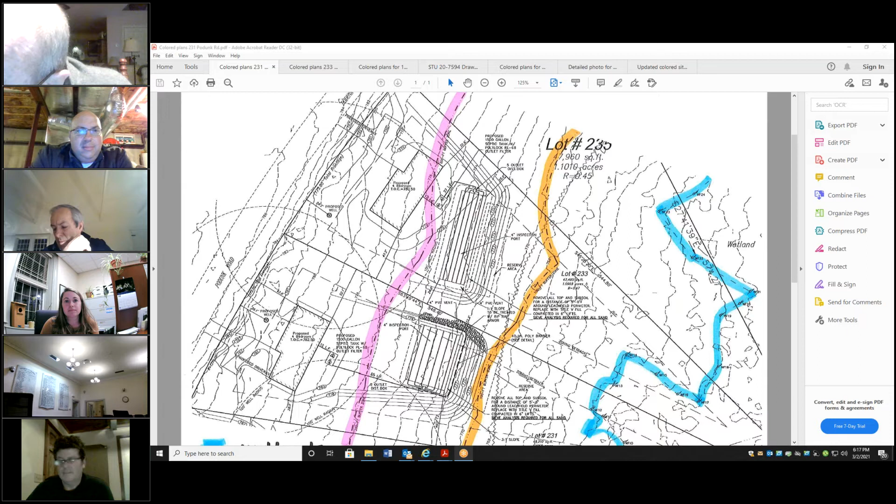You all set? Okay, Jeff, could we check with the audience? Hold on, we've got some video problems, it looks pink on TV. You mean other than the fact that I'm on screen causing the broken video? No, it's something else.

Is there anyone on the line that would like to speak to 233 Podunk Road? Is there anyone on the public line that would like to speak to 233 Podunk Road? No one's on the line, Mr. Chair. Thanks. With that, I'd like a motion to close the public hearing.

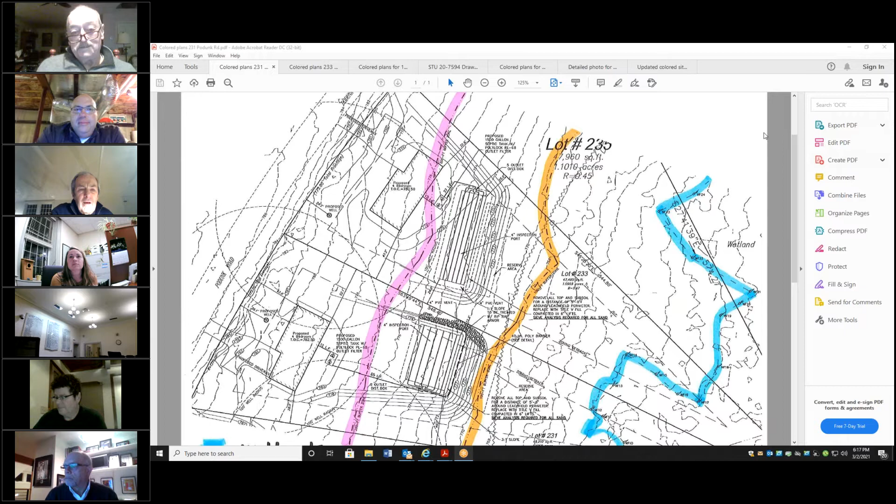So moved, Eric Kaspar. Seconded, David Barnacle. Any discussion? Hearing none, I'll take a vote. Eric, how do you vote? Eric Kaspar in favor. David, how do you vote? Barnacle in favor. Steve Haldeman, how do you vote? Steve Haldeman in favor. Stephen Chittister in favor. And Ed Goodwin in favor.

Do I have a motion to make a motion? I'll make a motion - David will make a motion. I make a motion that we approve of the local NOI regarding 233 Podunk Road for the construction of the associated site work and the construction of a single-family home there. Do I have a second? Eric Kaspar second. Any discussion?

Seeing no discussion, we'll have a vote. Stephen, how do you vote? Stephen Chittister in favor. Eric? Eric Kaspar in favor. David? David Barnacle in favor. Steve Haldeman? Steve Haldeman in favor. And Ed Goodwin in favor. Passes unanimously. Thank you all, thank you, Mary Ann. You're welcome, good night.

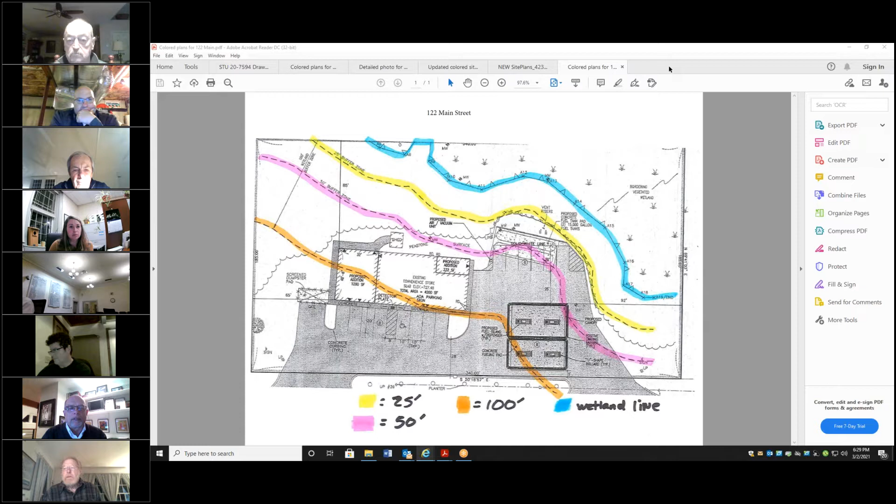So to accommodate that, they're requesting permission to relocate the pump islands as shown on the plan. It would be basically, as you're looking at the drawing, to the right side of the existing building close to Main Street. In doing that, it would allow us to create a little landscaping in front of the building, ADA compliant parking, and have the parking stacked in front of the building. We think it makes for a safer environment.

Now, as part of the plan, they are also contemplating two small additions to the building. One would be in the rear corner. If you've been out there, the building has sort of a little notch in the back, right in that area. It would be a small infill addition, within an upland area of the site at the top of the slope. Then a second addition on the opposite end of the building, the north side, would add some capacity to their existing facility, replacing an existing paved surface.

So we think from a mitigation standpoint, we're getting rid of parking lot surface in that area and replacing it with a building. As you might expect, we'll have a little better runoff quality coming off that surface when this work is done.

We also looked at some of the other paved areas of the site, particularly on the edges close to the wetlands, where we're proposing elimination of some additional pavement. I think in total, in addition to the area the building addition would occupy, we're probably going to eliminate another 1,400 or 1,500 square feet of paved surface and replace that with landscaping.

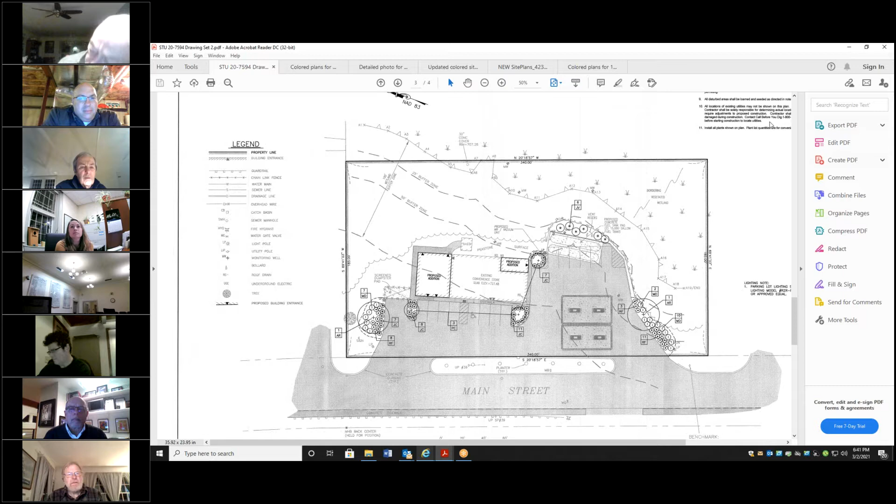There's no one on the line, Mr. Chair. All right, thank you, Jeff.

Thank you. Mr. Chairman, could we ask one more question based on the explanation he just gave to Eric? Sure. When the tanks were taken out and new tanks put in, was there any testing done under the old tanks to see if there was any amount of residual materials left? And has this been reported to the state, or did they miss the state as well as missing the town? My understanding is there's been an LSP involved in all the work on the property. There had actually been an LSP on site prior to the tank removals, and during the tank removal operation they had the fire department involved as well. So they did follow all the state procedures for tank removal, testing, and replacement. They did unfortunately skip you folks, which is not appropriate.

I'm also not very happy on my client's behalf that the contractor has not put up the silt fencing yet, because that was something I had mentioned to them months ago that should have been done. So my call tomorrow will be to the contractor on that issue. I can't make excuses when they're not following even the basic rules.

Isn't there a requirement that the town be forwarded a copy of the results of the testing that was done? I thought that was protocol. I'm not the LSP, and our firm did not provide that service, but I can find out who that consulting firm was and get that person directly in contact with your office to make sure the paperwork gets there. That'd be good, thank you very much.

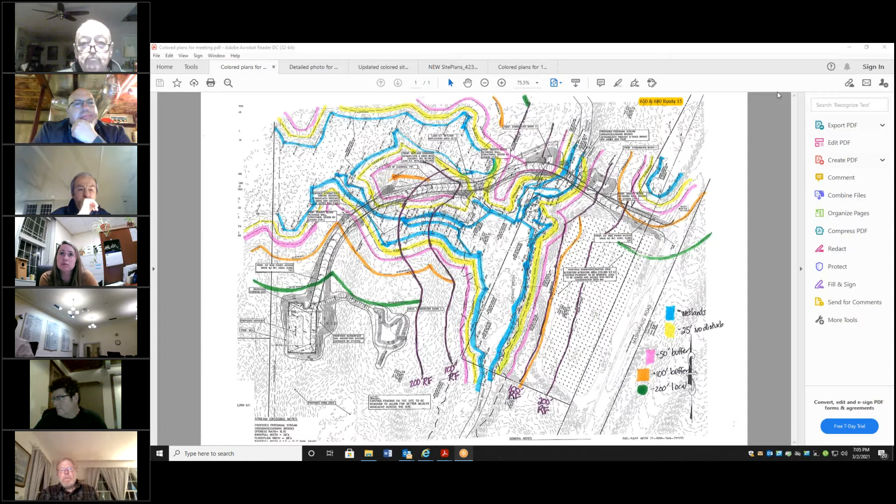Anything else? All right. With that, I'd like Mark - or what? Should we go to the public? Yeah, public. Jeff, do we check with the public?

While we're waiting, I forgot to add - one of the comments from the Board of Health was that they show a proposed septic system back here. There's been no perc testing per Board of Health back here, or no records of that, in order to approve a septic system there if it gets to that point. You guys are going to need a perc test out there. That's in your report. Yeah, right, it's in my report. Yeah, we're aware of that. Obviously it's chicken and egg.

We have to get in there to do the perc test, but you're right. If they're going to put in a bathroom - which by the way, they did not propose a bathroom to us - we put that aside in there just as a placeholder in case they do expand to that point.

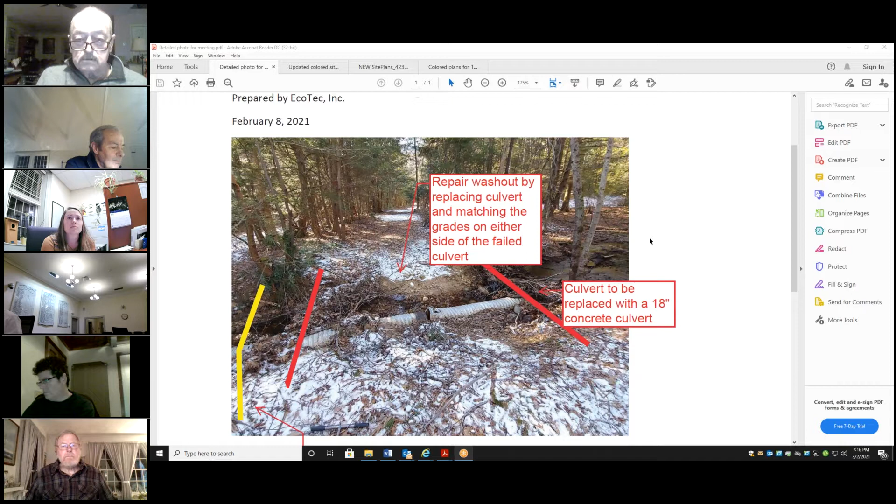I think that pretty much summarizes it. As I indicated, we feel it fully meets those agricultural exemptions. And even if the commission felt it didn't, I think repairing and replacing this culvert at the same exact size and restoring that area would be an improvement and would prevent sediment and material from washing downstream during large storm events.

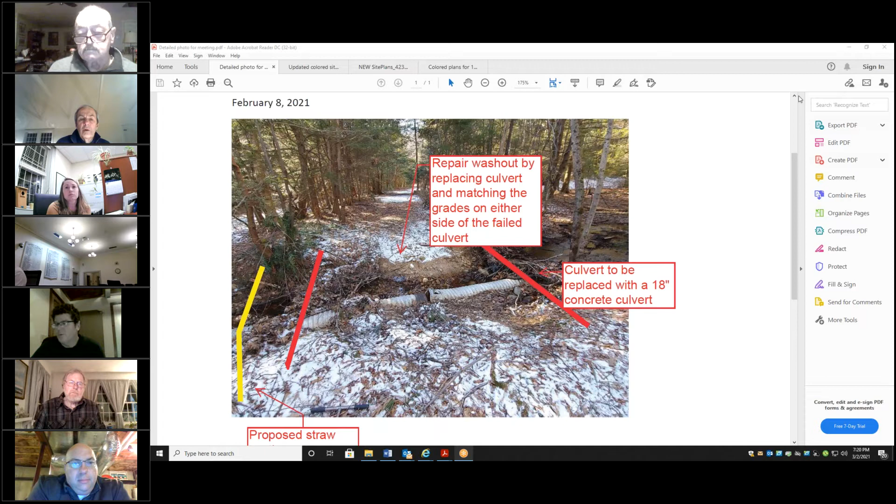Stephen: Same comment as David, and I agree with Becky's comments. Steve Haldeman: I agree with Becky's comments, and I think we should follow them and require those comments. Eric: DEP seemed unambiguous in this, so I would tend to follow what they have to say and Becky's comments, so I'm in agreement.

Let's clarify. You approved the logging permit at the last meeting, four of you. At that time, Michael told you they were not going to take trucks onto that property, that they were going to use the skidder only to go onto that property, and that they would put a temporary crossing there. So to come back in and ask for a permanent crossing is for a sand and gravel operation, which is what they intend to do next. So Becky's exactly correct. We need a positive number 3 and a positive number 5, and it's as simple as that.

Do I have a motion to close the public comment? Go ahead, public comment, please.

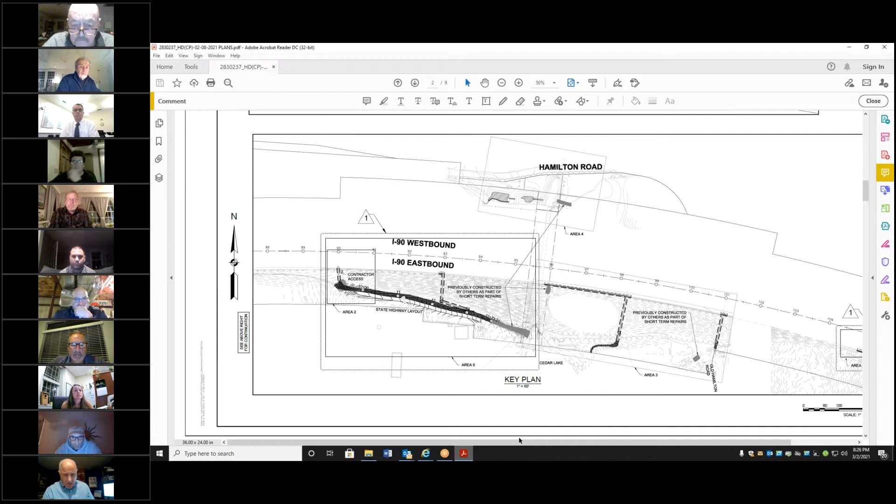This plan helps because it's a long linear site that we're dealing with. The plan on top is unchanged from the work we had proposed previously, with just the two catch basins way to the western end, basically the top of the drainage area along the turnpike. But on the southern, bottom section, we've added a new area to the east end of the project - we're calling that area 6. The area in the center, which is the low point, the pipes have already been put in going down the hill - that's area 3. Area 4 is on the north side of the turnpike, and areas 2 and 5 are that bigger area. So how about we go to the next page?

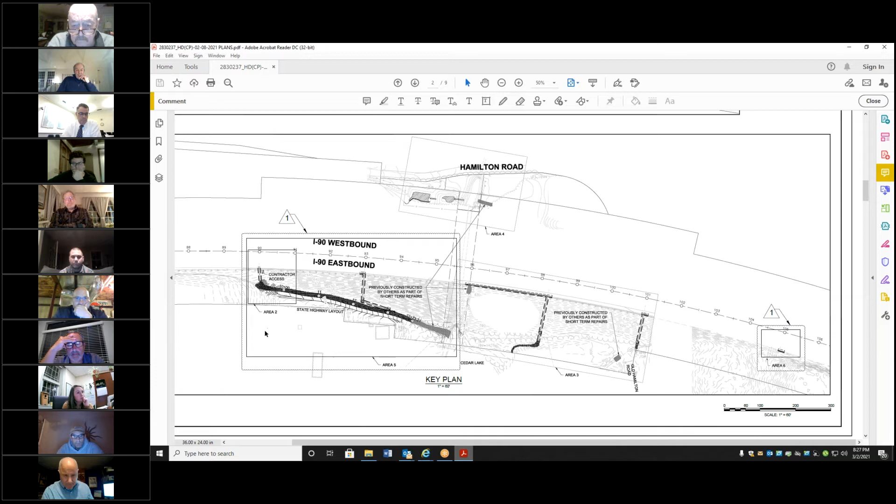And please, anybody who wants to jump in, please do. The box to the lower left is area 6, where there are existing drain pipes coming from the median that outlet into a swale there, and we've decided to add a catch basin. The turnpike has what they call a special drop inlet, a catch basin with a 2 foot by 4 foot grate opening, so it catches quite a bit of water. Directly over the pipes, we're putting a more standard catch basin, which is a 2 by 2 grate. Both of them have sumps, so we'll be collecting debris before it gets into the drainage system.

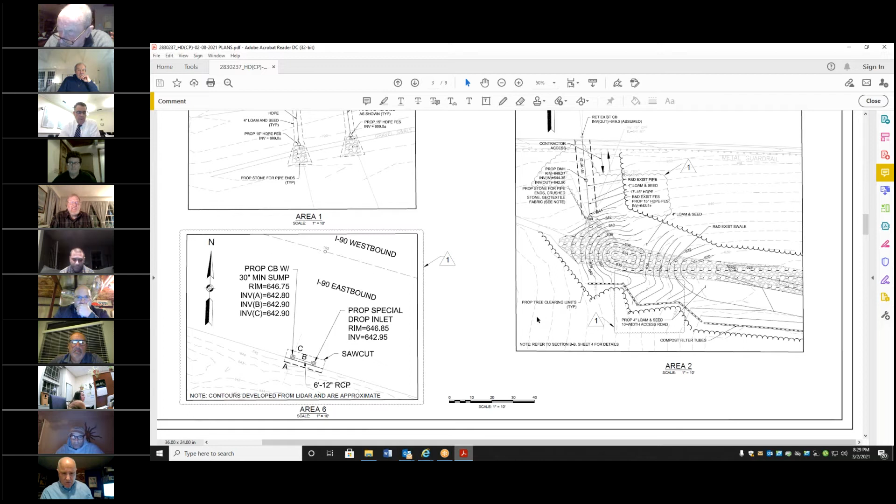Now, on the right side of this plan view, there's an existing drain that comes from the turnpike down into the small infiltration basin we had proposed previously. Correct me if I'm wrong, Arthur, but I believe Arthur did video of it, and that existing plastic pipe was not in good shape, so we made the decision to replace it with ductile iron. Then it comes out at a flat slope in order to reduce the velocity going into that infiltration basin, and continues into the swale, but that's shown on another sheet. So we can scroll to the next sheet unless there are any questions.

I have one question, please. Sure. You indicated debris - can you give us an indication about what size debris is being filtered out, please?

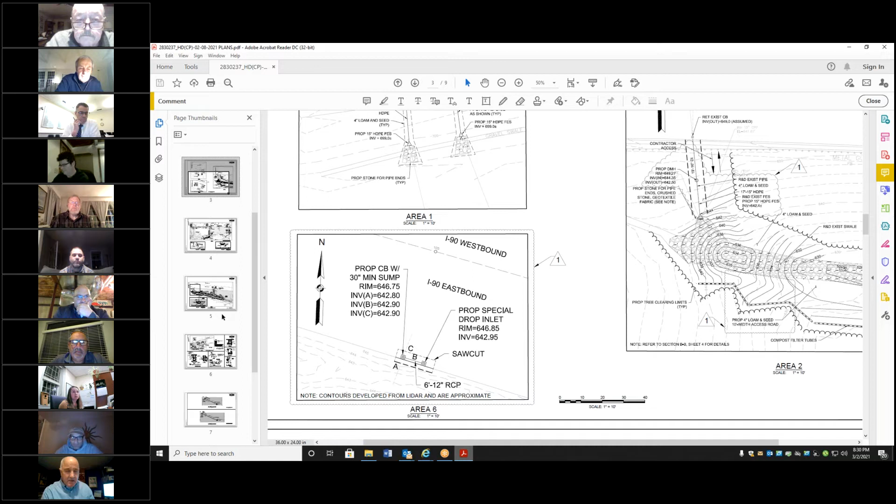Well, it's just the small grit that accumulates on the roadway surface. There may be small pieces of trash that fall down into these catch basins, but it's got to be pretty small to make it down into the grate area. One always worries that everybody's definition of debris size can vary monumentally.

Good point. Well, this area is area 3, which had been previously proposed. The only change we're making here is that when we got into construction, Arthur and others noticed that the existing structures in the gutter were makeshift, and we really don't know why they weren't very good structures. So MassDOT has decided to replace each of them. There are 3 new catch basins going in. At each of these points we have the 2x4 catch basin, typically on the uphill side, which will catch the majority of the water. On the downhill side, we have the smaller 2x2 catch basin. So that's the only change on this sheet, the addition of those 3 catch basins at each of these locations.

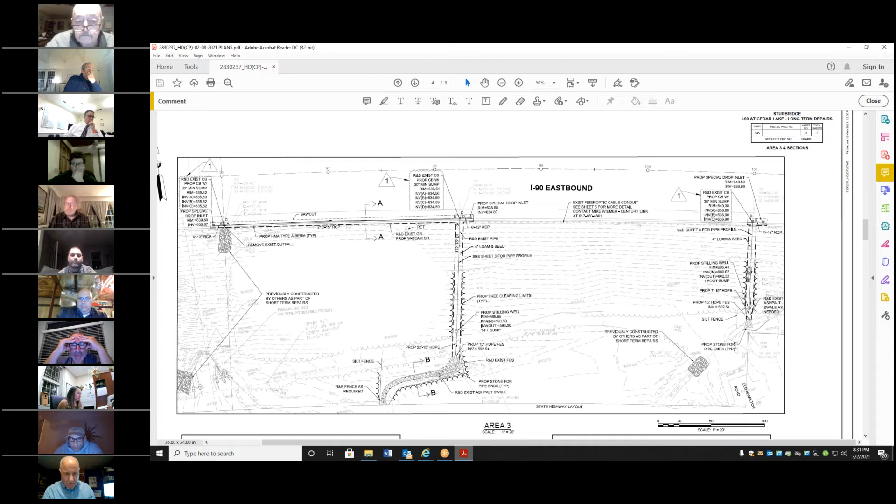So this is a brand new sheet here. BSC performed survey just before the snow fell back in December, I think it was. We had some survey in this area, but we've augmented it, and we went all the way down to the layout line of MassDOT. We also located the house there that you can see just off the edge of the Turnpike property. It's very, very close to Turnpike property. And that's the one that had that incident back in the fall.

I think there was a large rain event and then a blockage in the swale. So we have now called for the entire swale to be replaced, and there's a section there that shows stone that we're putting in. It'll look essentially identical to the one that's out there today. The one thing we did do is create a relatively level area to the south side of the swale, so MassDOT can come down and do some amount of maintenance. It certainly isn't going to be equipment that's typical on a roadway, but Arthur can speak to greater length about that, vehicles or equipment that can come down in there to clean the catch basin.

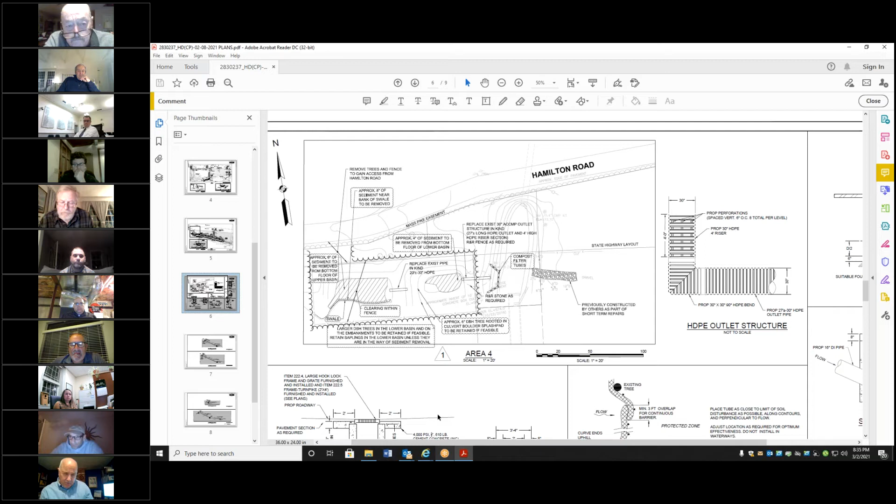And then if we continue down on the plans, Rebecca, not the next sheet which is the typical profile, but the last sheet, this is the new sheet that shows the two new lines that have been designed.

So that's the extent of the changes. Was there anything that I missed, Arthur, or that you want to expand upon? I think that's it.

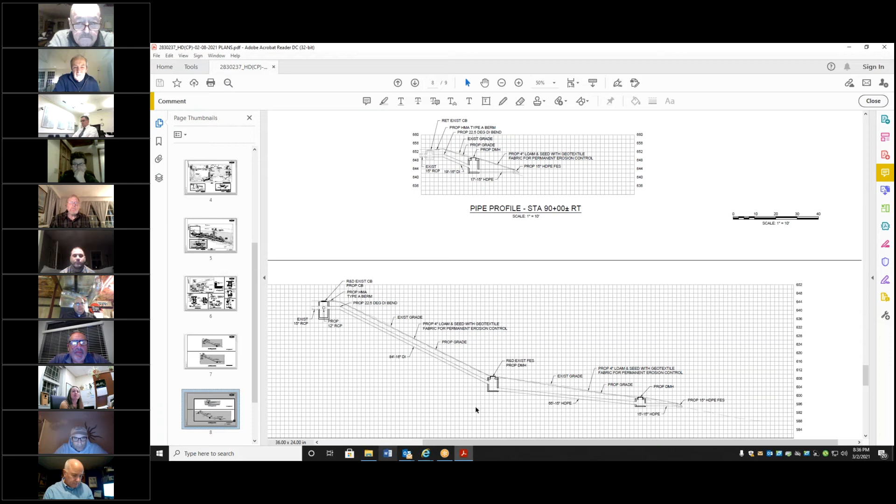Well, that's pretty damn good. That's what we were arguing about at the beginning, wasn't it? To get those changes made originally? Yeah, right. Wasn't that the conversation about which was more of a benefit - to take down trees and do what we're doing now, or to leave a buffer. I think we've all come to the conclusion that redoing the entire swale is the proper thing. Good.

When, what's the timeline on this? I gave the plans to the contractor last week, he's looking at them now. Obviously there's quite a bit of work on that swale - I think up to a couple hundred tons of rock that's got to get moved down there, so that's going to take some time. He's got to order his concrete structures, which there's been a delay due to COVID on the concrete structures throughout MassDOT.

That's probably the one area we really don't have any control over, the precast structures. One precaster went out of business, so everybody's kind of scrambling, and a number of jobs have been delayed because of the precast issue.

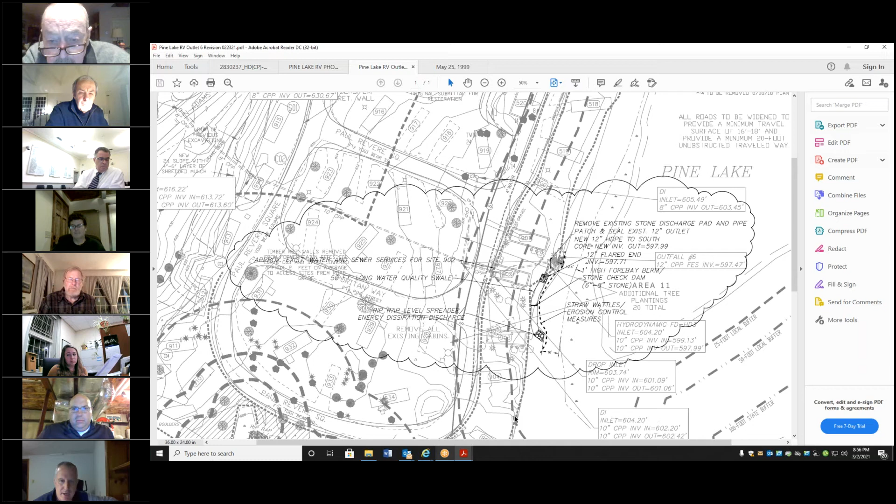Corey Broder from Lenard Engineering put together a sketch plan - could Becky put it up on the screen? Essentially what would happen is at the outlet there'd be a swale so we could provide some infiltration, recharge, and additional water quality treatment before that water gets discharged to Pine Lake. If you recall, I think pretty much every single discharge point on this property has been retrofitted from what was approved, so there's additional infiltration, additional stormwater basins, and significant additional treatment before it gets discharged to the stream or Pine Lake.

So in this particular instance, the water gets collected in catch basins, goes through a water quality unit, and is discharged to the rear of one of those sites, then flows from there down the slope into Pine Lake. In this instance, I believe there'd be about two trees, 4 or 5 inch diameter, that would need to be removed. Then you could install a swale so the water would slow down, allow some infiltration, and some additional treatment before it reaches Pine Lake. So it would be another water quality feature.

Has this been done? No. Has it been marked so we can look at where it's going to go? Yeah, it'd be easy to go out there because it's right at the outlet - if you recall, we were looking at outlet number 6. When you say it's right at the outlet, are you proposing to put it over the banking? It would be built into the embankment there to create a swale. Why wouldn't it be right on the land prior to that, that was open? We looked at those areas.

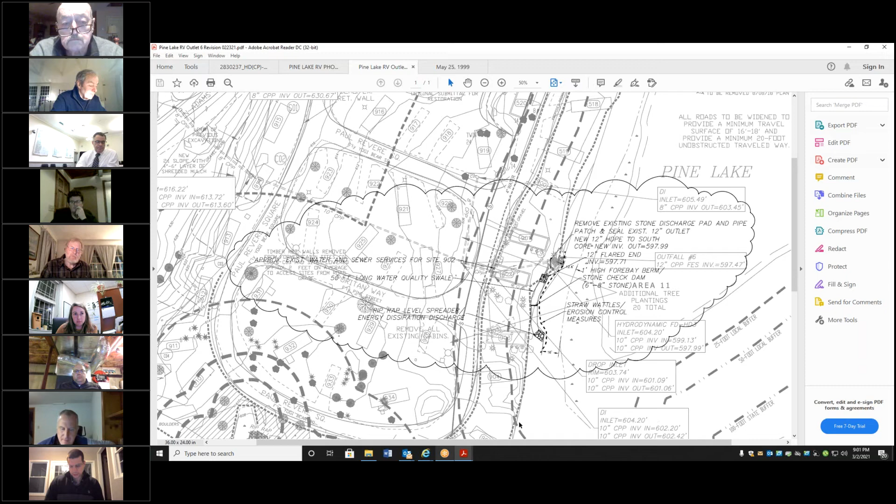Because there is some level of disturbance that gets caused by pulling up some of that silt fence, if you could wait until late April into May when you're into the growing season, it would quickly revegetate. So I think it's worthwhile to simply wait until the spring and then work with Becky to make those changes.

Okay. Becky, what are the staff recommendations on this?

All right, so going through item number 1, I went through the letter that was provided and the materials, and I went back to where we had provided some comments on those materials.

There's a table included that shows the plantings. It doesn't look like all of the plantings were put in according to what's shown on the table for the orders of conditions. My recommendation at this time would be that we set a time frame to complete the plantings. As most of the project is completed now, those plantings, the restoration areas, were primarily a result of the first enforcement order that was issued on this property. So I think it would be advisable to get a commitment from the property owner for the completion of the planting plan. Because we saw some issues with getting plants last year, I'd recommend giving a time frame to the end of this growing season. I'd also recommend that this is put into writing, that there's a commitment to complete that portion of the project, as it was the result of the first enforcement order issued on site here.